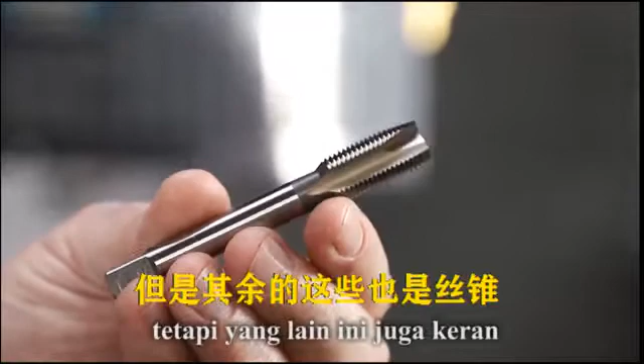Now we all know what this guy is, but the rest of these are also taps, but they're all made for a different purpose. This guy here might be perfect for hand tapping, while this one is definitely not. Some are great for specific types of holes, and others are great for specific types of materials. And it's easy to spot the differences between all these taps if you know what to look for.

So that's what we're going to do today. We're talking taps and snow plows. You'll want to see this.

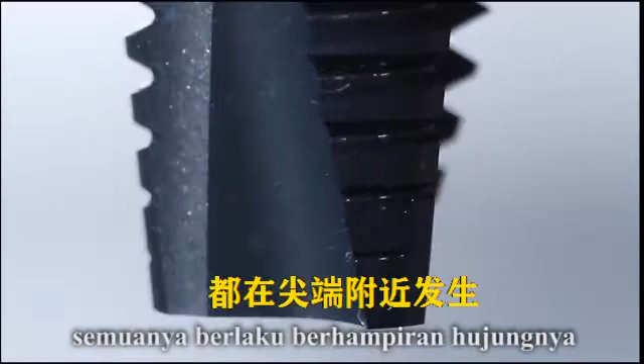The important things that make one cut tap different from another all happen here near the tip, where the cutting face of the tap first cuts our threads. The angle of this cutting face right here, as it turns out, has a giant impact on what a tap can be used for. And to illustrate this, we need some snow and a snowplow.

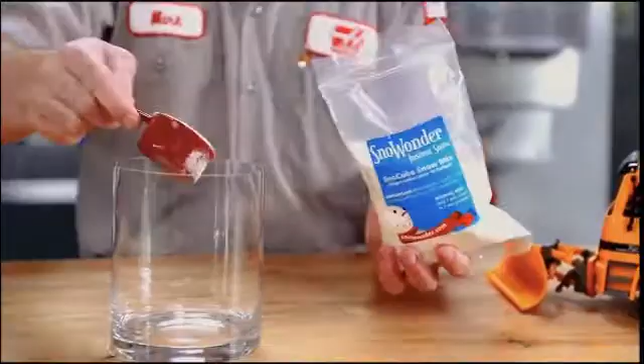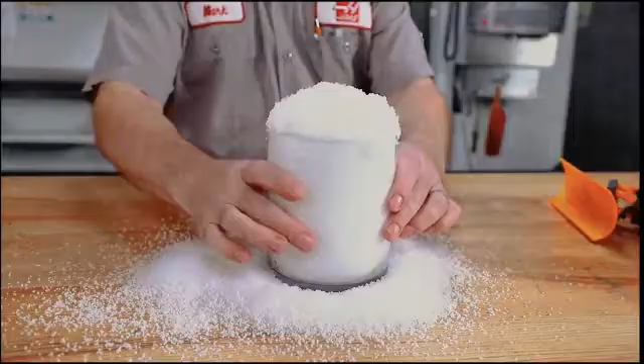If our plow is set to a negative angle, which way do we expect the snow to be pushed? Hey, don't look at me like that. This is going to change the way we think about taps.

Okay, of course, blade tilted left, the snow goes left, towards the bottom of your screen. Now if we rotate the blade, giving it a positive angle, we expect our snow to pile up on the other side, towards the top of your screen. And if we straighten up our blade, our snow is going to escape in any direction that it can, piling up both to the left and the right of our truck.

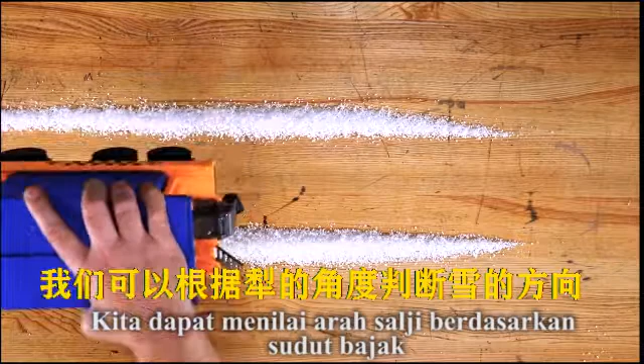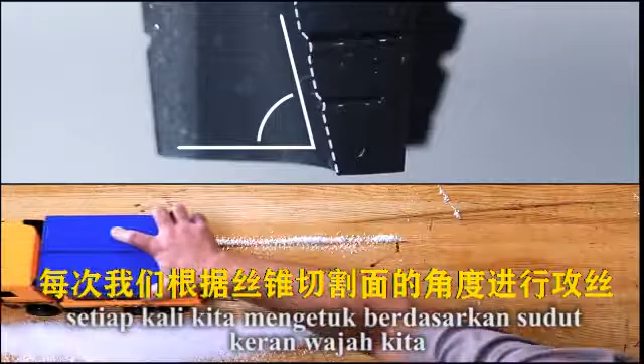We can tell which way that snow is going to be pushed based on the angle of our plow. And in the same way, we can tell which way chips are going to be pushed every time we tap based on the angle of our tap's cutting faces. Here I have 3 taps: a spiral point tap, a spiral flute tap, and a straight flute cutting tap.

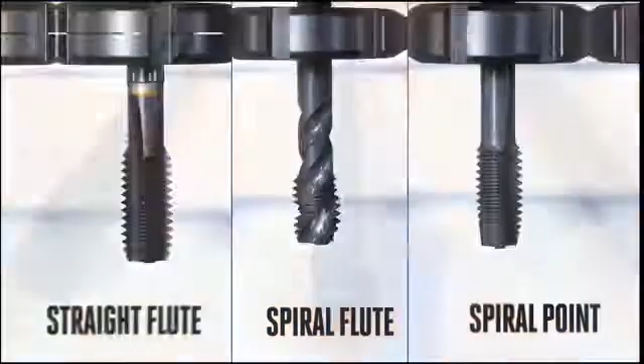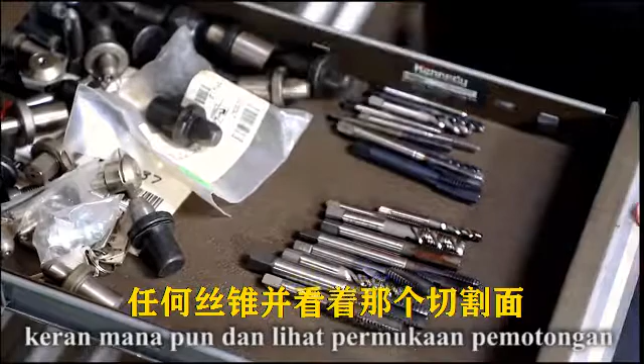Yes, the flutes might be different between these taps, but I'd like for you to ignore that for now and focus only on the tip of the tap, on our cutting face where everything important happens. Now, just by picking up a tap, any tap, and looking at that cutting face, we should be able to tell which way the chips are going to go, up or down, just like we could tell which way the snow was going to go with our snowplow.

A spiral point tap will force the chips downward into the hole. A spiral flute tap will pull the chips upwards out of the hole. And a straight flute tap will just shrug its shoulders and let the chips go up or down, whichever way they want to flow at that moment. Knowing which way those chips are going to go is really important. It's critical when choosing a tap or when programming a tap you've already chosen.

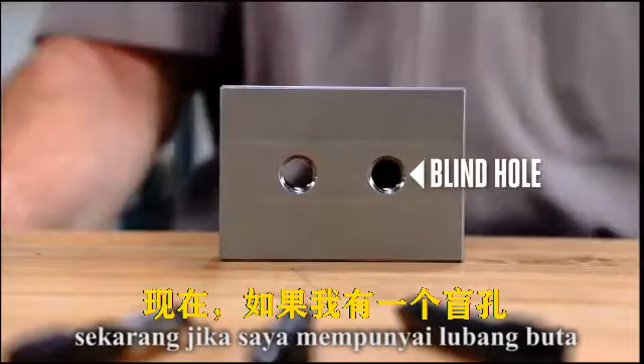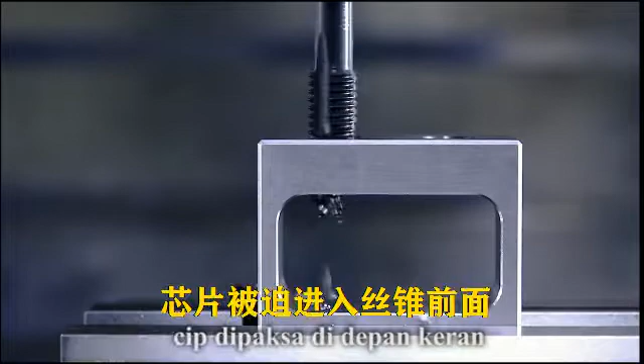Now, if I have a blind hole, which just means you can't see through it like we can with this one, you'll have to be really careful if using a spiral point tap. With a spiral point tap, the chips get forced in front of the tap. And if there's not enough room at the bottom of that hole, those squished chips are going to chip your tap or even break it.

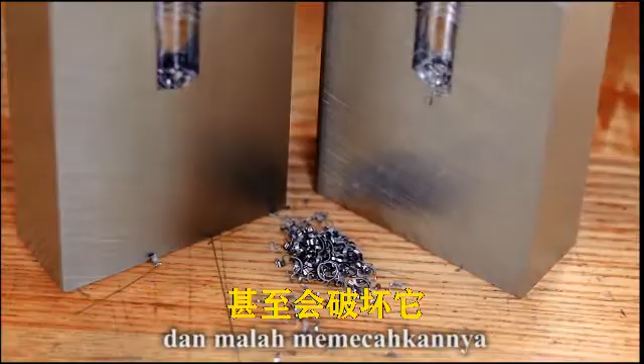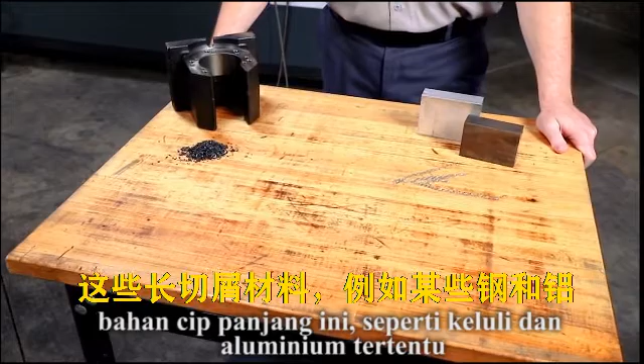But not all chips are the same. Some of these materials leave long stringy chips when being machined. These long chipping materials, like some steels and aluminum, create this cut thread wire that has to go someplace, either out of the hole or deeper into it. Our spiral point or our spiral flute tap dictate which direction these chips are going to go based on their axial rake angles. That's the angle on that cutting face.

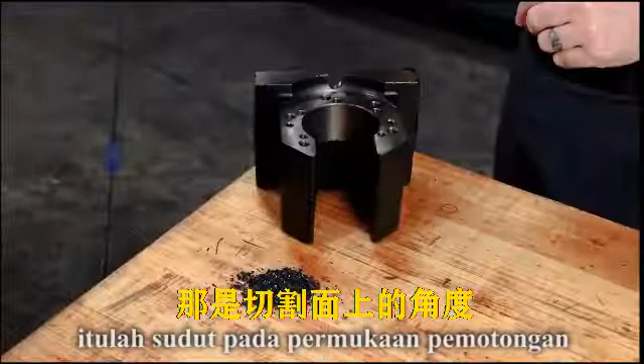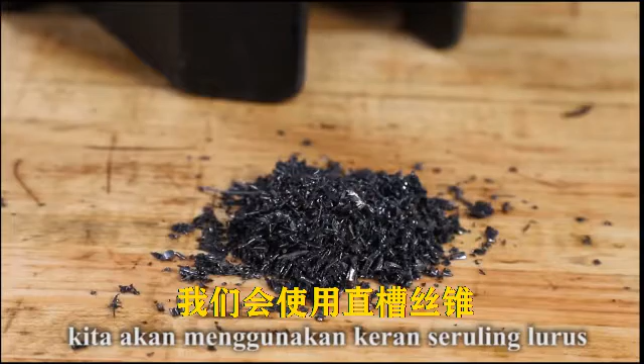Some materials, like cast iron, are short chipping, creating almost powdery chips. It's usually on these short chipping metals that we'd see a straight flute tap being used. Now, chip control is only half of our story. The other defining feature of our taps is the chamfer on the tip.

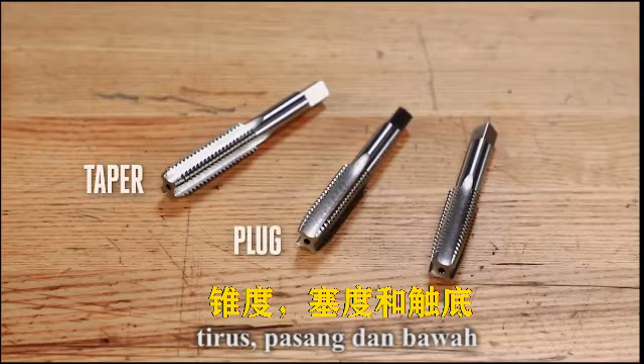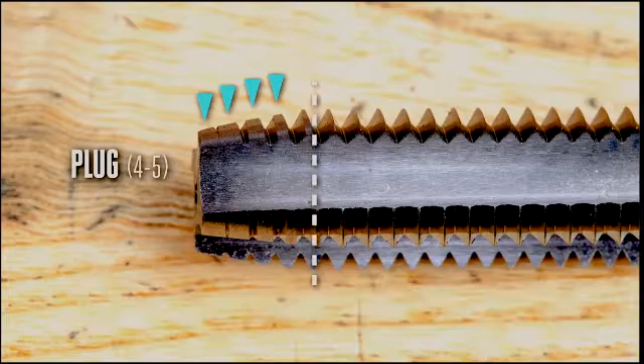These 3 taps show the difference between our 3 most common chamfer types: taper, plug, and bottoming. Now, here in the US, when we say plug tap, it's more than just a name. It's a technical term describing the chamfer on the cutting tip of our tap. 4 to 5 threads worth of chamfer is what makes a plug tap a plug tap. In the same way, a taper chamfer is usually 8 or 9 threads long, and a bottoming chamfer tap has a chamfer that is about 1 or 2 threads long.

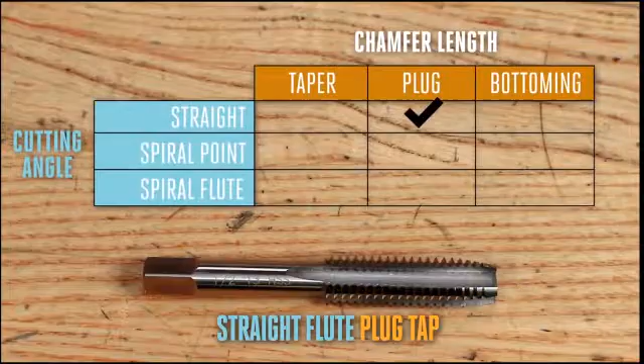This is the vocabulary of taps: the grind on that cutting face and the amount of chamfer before we reach a full thread is all wrapped up in the tap's name. Here is a straight flute plug tap. This one here is a spiral flute bottoming tap. And just from the name, we know that it's going to pull the chips out of the hole, and it's got about 2 threads worth of chamfer before it reaches that full thread diameter.

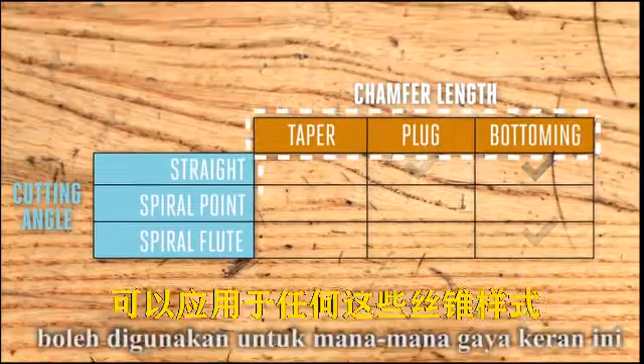This guy here is a straight flute bottoming tap with about 2 threads worth of lead-in. And remember, any of these chamfer types, taper, bottoming, plug, can be applied to any of these tap styles. Okay, we know the names and what they mean. Here are some examples of why we might choose one tap over another. Now, this is our classic blind hole. This hole does not go through the part.

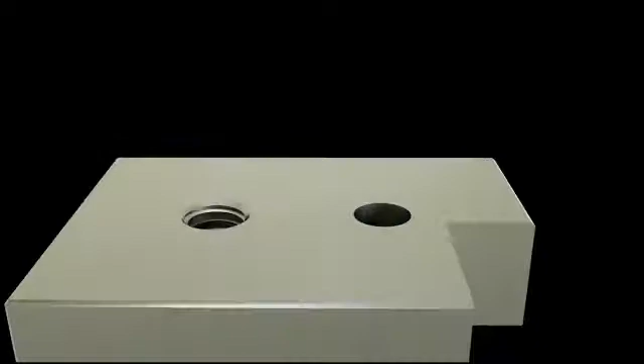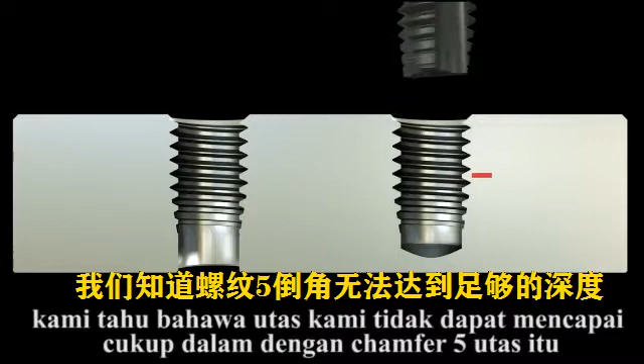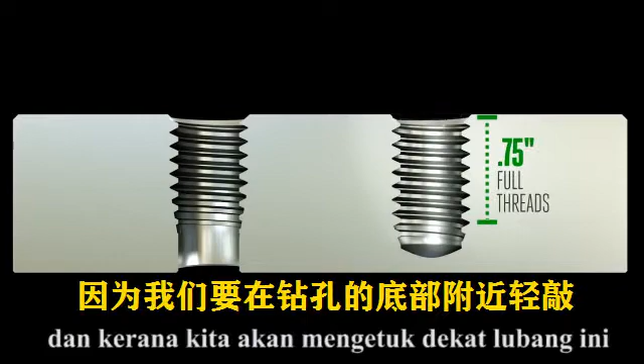The engineer has asked for 3/4 of an inch of full thread depth here, but the tap drill is not allowed to break through. With a plug tap, we know that our threads won't be able to reach deep enough with that 5-thread chamfer. So for this particular threaded hole, we'll need to go with a bottoming tap. And because we are tapping so near the bottom of this drilled hole, we don't want to be pushing chips with a spiral point tap. So we're going to go with a spiral flute bottoming chamfer tap.

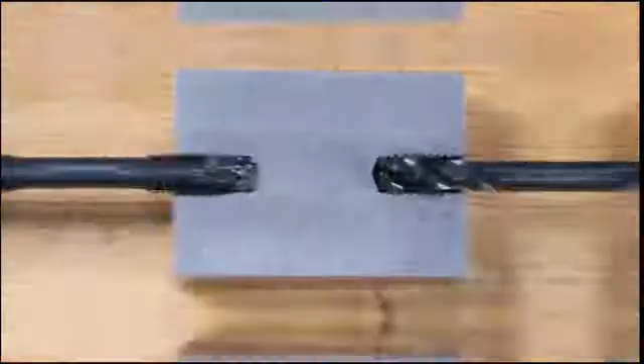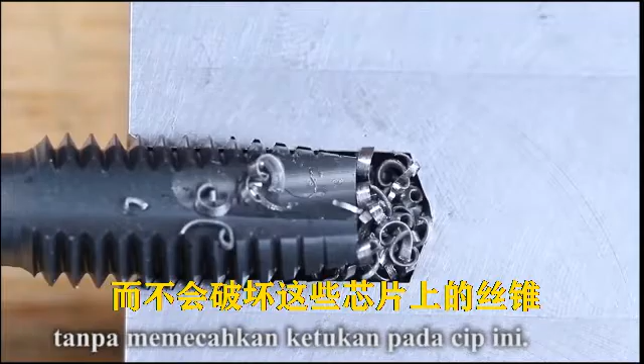Once again, the only way we're going to be able to tap clean to the bottom of a hole is if there aren't any chips in the way. With this spiral point tap, you're not going to be able to get the tap all the way to the floor of the hole without breaking the tap on those chips. Spiral flute, spiral point. So if this spiral flute bottoming tap works so well, why don't we just use it on all of our holes, even this through hole?

Well, these taps are often more expensive, but beyond that, they take the highest cutting force of all the taps on this table. What's happening is we're spreading the load over just the first couple threads, that first 2 threads of chamfer. That means that a bottoming tap is going to always wear out faster than a comparable plug tap.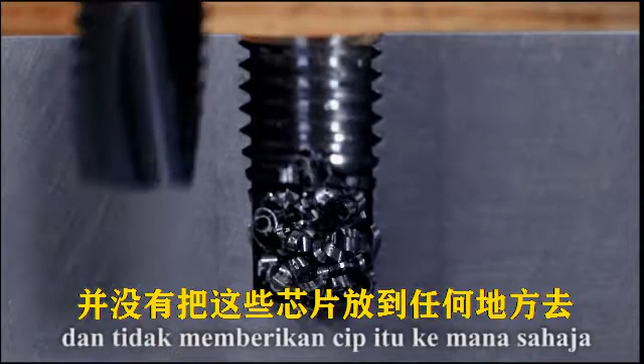Now, if you broke a tap in the last year, chances are it was one of these spiral flute bottoming taps on tough material. It's a weaker tap. If you're breaking one of these spiral point taps, you're probably going into a blind hole and didn't give those chips anywhere to go. Our spiral point plug tap is usually our first choice whenever possible.

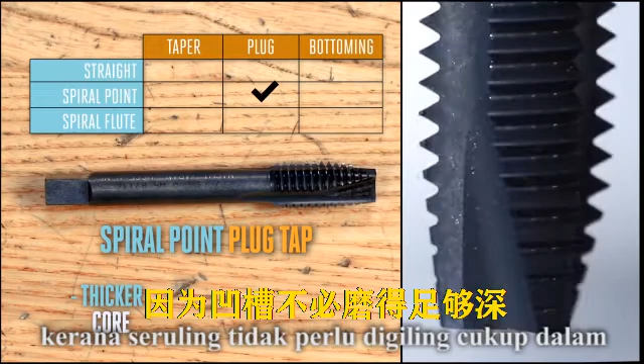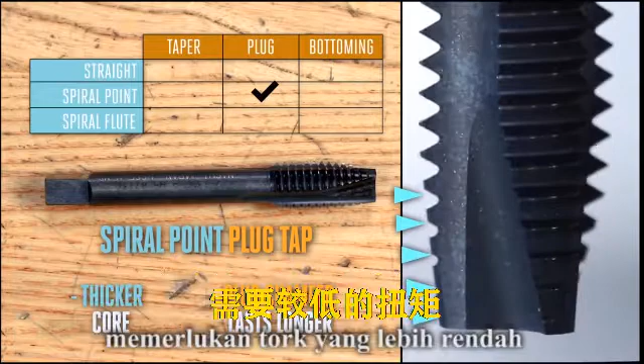Now, it has a thicker core because the flutes don't have to be ground deep enough for chips to escape through them. The plug chamfer on this tap is spreading the load and wear over 4 or 5 threads, requiring lower torque and lasting much longer than a bottoming tap. For these reasons, we're going to use a spiral point plug tap whenever we can, and we're going to save these spiral flute taps for special cases, like reaching the bottom of blind holes.

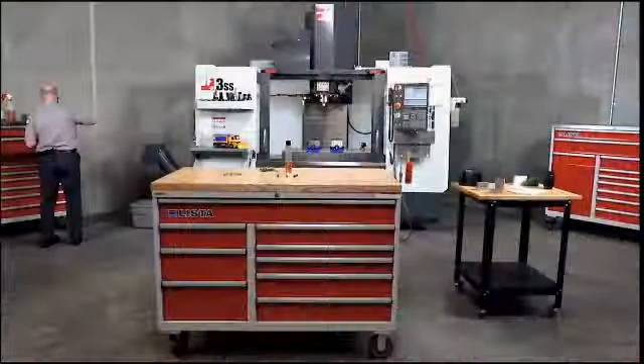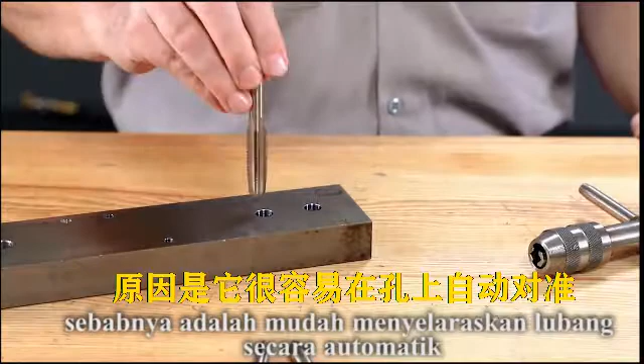Now, if we do have to hand tap something, it's best to grab a taper tap. The reason for this is that it self-aligns really easily on the hole. It straightens itself out. If you try and hand tap something right off the bat with a bottoming chamfer tap, you're going to have a hard time with alignment. This thing does not want to stay straight. So if hand tapping, grab yourself at least a plug chamfer tap, and best case, taper tap.

Now, if you do have to go to the bottom of a blind hole, start off with a plug tap or a taper tap, and you work your way down to the bottoming tap. You can actually follow up the one tap with the other. Now, we've talked about taps and why we choose one over another, but as an NC G-code programmer, I need to know what tap I'm going to use before I write my program. It's important.

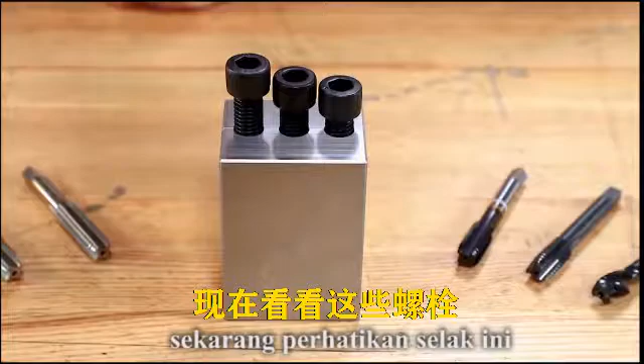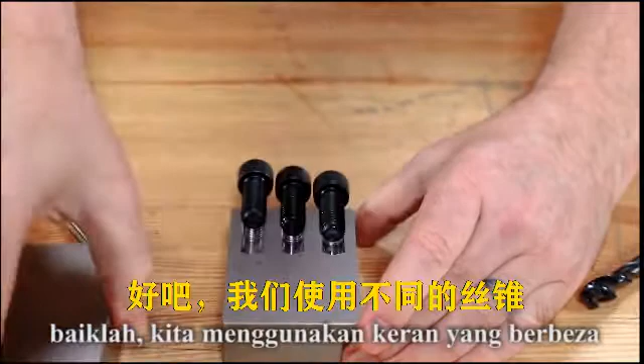Now, look at these bolts. These 3 tapped holes all used the exact same G-code program. They were all programmed using a G84 to Z-1 inch deep. But when I go to put the bolts in them, you can tell that some bolts are going in farther than others. So why are the heads of the bolts sticking out at different heights? Well, we use different taps, different chamfers on the taps. So we're not getting the full thread at the same point.

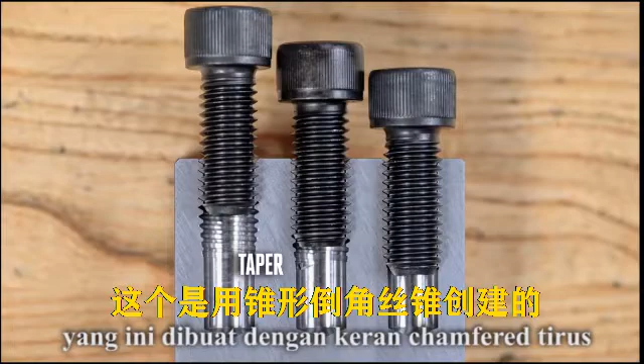This guy was created using a taper chamfer tap. This one was created using a plug tap. And here, this one was made with a bottoming tap. So if you're using a plug tap, you have to account for that extra 5 threads worth of pitch. You've got to program 5 threads deeper if you want to get to that full diameter. Just something you should keep in mind.

We talked about cut taps today, and some of you are wondering why we didn't mention form taps. Well, form taps are amazing. They're used on ductile materials that can be crushed or have the threads formed into them. But there's so much that can be said about them that we thought they deserved their own video. But what we do have for you is a few tips that you can use if you're running into problems while tapping.

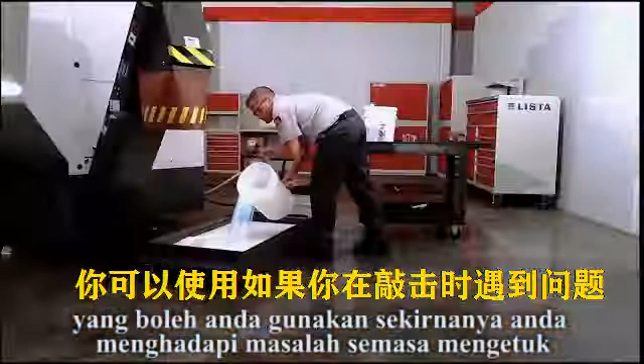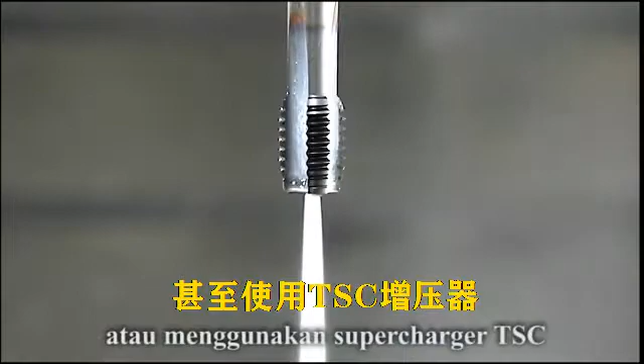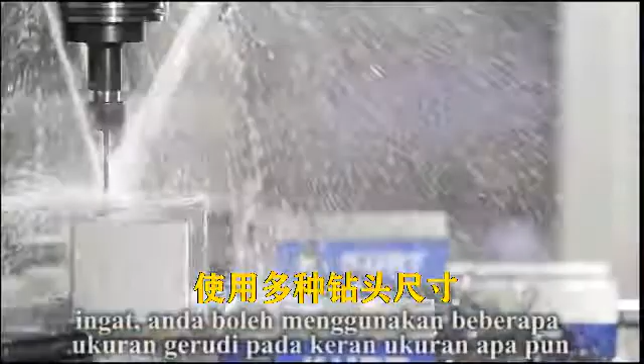And remember, there's a range of drill sizes that you can use for any size tap. Use that to your advantage. Sometimes going with a larger diameter drill can make things easier on your tap while still keeping you within spec. And always check your drill depths, accounting for the angles on those drills and your taps. Some taps are pointier than others, it's just the way they were ground, so you have to think about that before you run them.

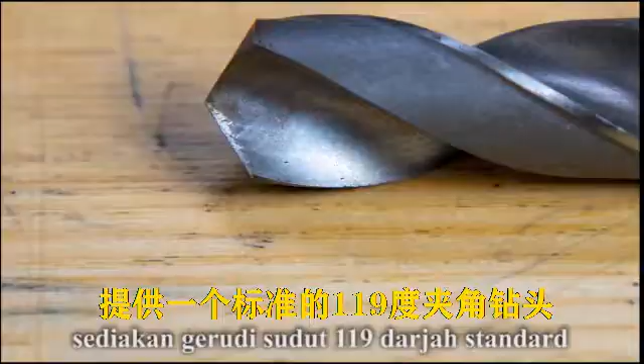Now for your drills, a standard 119 degree included angle drill, you can just multiply the diameter times 0.3, and that's going to give you that point length. And finally, talk to your tool reps. These guys know more about tapping than we ever will. One thing I will mention is that if you're tapping on aluminum, you'll probably want to go with a bright finish tap, a nice polished, shiny surface, so the aluminum won't stick to it and gall. And we'll save the black oxide finishes for ferrous materials.

The next time you pick up a tap, think snow plow. Just by looking at that cutting tip, you're going to be able to tell if the chips are going to be pushed into the hole or drawn out of it. Now, I want to mention that the names of the taps that we use today are kind of all based in the US, right? Plug tap, bottoming tap, taper tap, but they might be called something different where you're working, in the UK or in Germany or Japan.